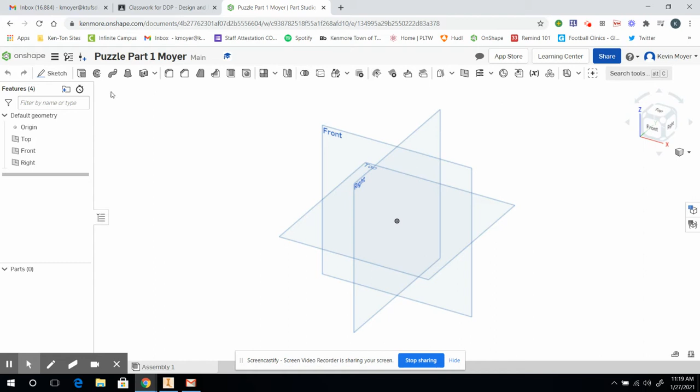The next step when you get in here is to sketch. I always like to sketch from the front plane, so I'm going to click the front. Then, using the cube over here to the right, I'm just going to click on the front. And I'm going to use the line tool to start drawing my shape.

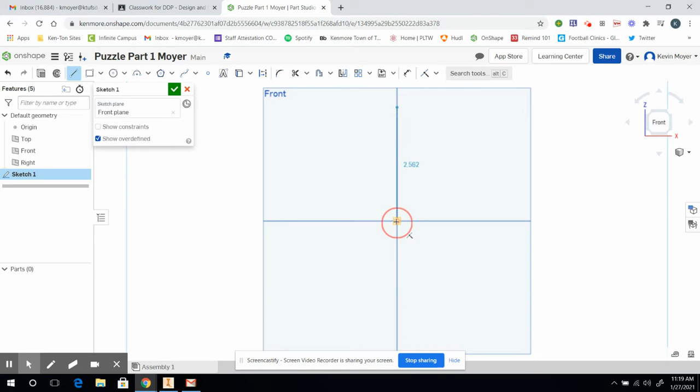You don't have to worry about the measurements right now. You just have to make sure it's close and try to keep everything at 90 degrees. Now once you have this complete, the next step is to dimension everything.

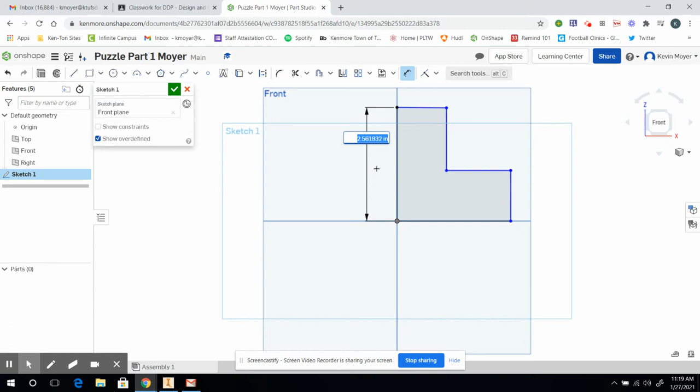So each cube on your shape is 0.75. My part is going to be 2.25, which is equivalent to 3 cubes. This is going to be 1 cube. This is going to be 2 cubes. This is going to be only 1 cube.

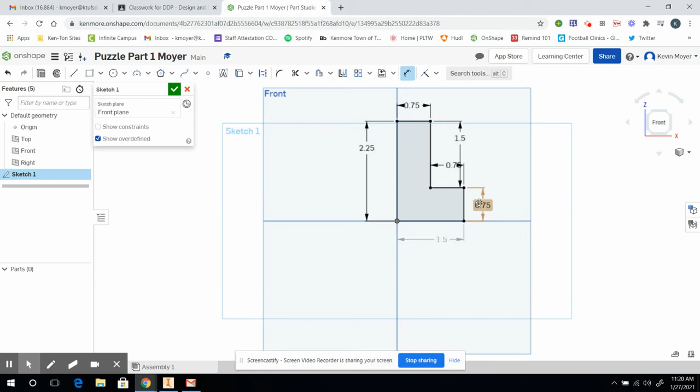Now you don't have to dimension these two things because it'll actually over dimension the part. But for whatever reason, because you have this dimension and this dimension, this becomes shaded. Now this one should have been shaded as well. Not really sure what happened there.

Okay, so after you're done, you're going to click the check mark here, and then click the extrude button. The extrude button will give it some depth. So its depth right now is 1. You're always going to have to change that to 0.75 because the default is always at 1. Then I'm going to click the check mark.

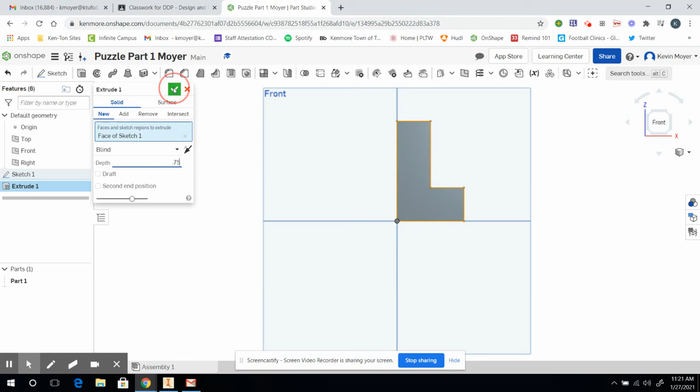Okay, so if I look at this now, it's extruded out and it gives the part some depth. Let's just say that you guys have another cube that's attached to this L shape.

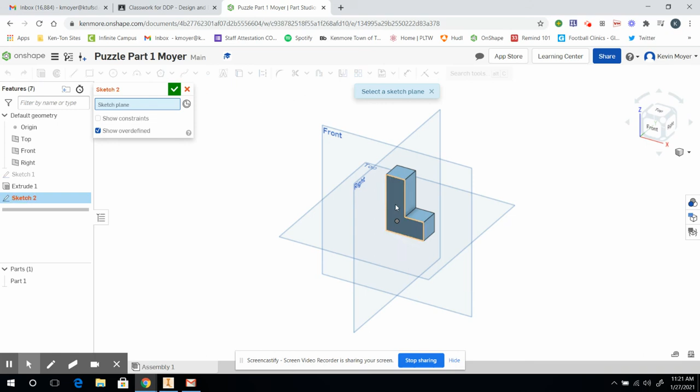What you do next is you take the sketch tool again. You'd click on the side of the part that has the extra cube on it, and click. Next, you could take either the line tool—for this specific one, I'm going to take the rectangle tool. I'm just going to draw the rectangle, and you can see that it snaps to that dimension, and draw a rectangle right on that part.

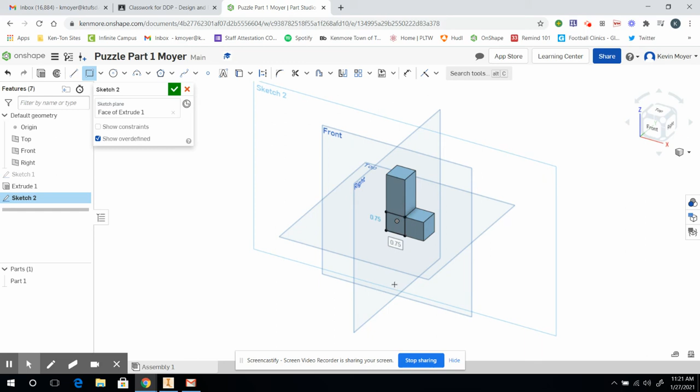Now I'm going to extrude this, and again, change the extrusion to 0.75.

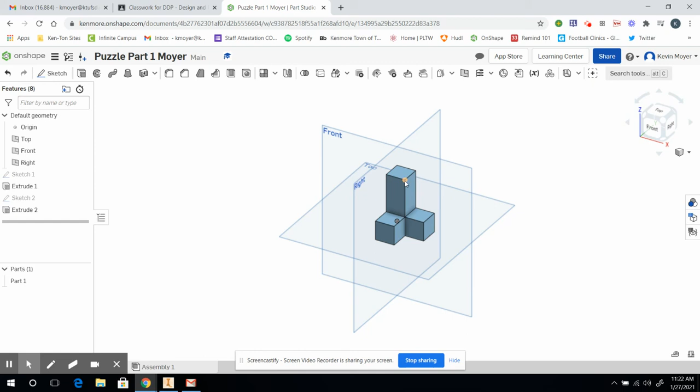The last step is just taking this part—there's a little appearance panel over to the right, and it's kind of shaded in right now as blue. You double click on that, and now you can change the color of your part. So let's say you colored this part in green. You click green, and then you'll click the check mark. Use the colors that you use for your specific part.